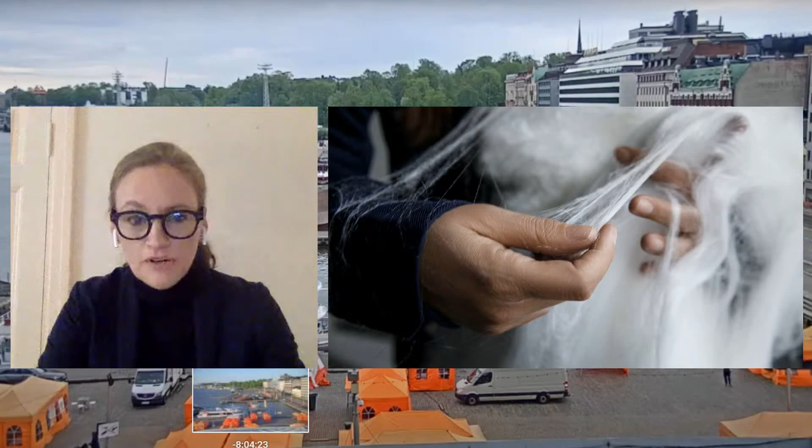Helsinki as a city and Finland as a country are known for design and architecture. Our legacy in functional modernism punches way above our weight. For example, the Finnish baby box, first introduced in the late 1930s, has been a design and service design concept for parents around the world. Today we are pioneering sustainable material innovations, like the cellulose-based fabric Spinnova shown in the image, along with well-being devices, education tools, and healthcare solutions that are embraced around the world.

When we talk about our city, we always talk about design and architecture. Yet our two national museums designated for design and the built environment, the Museum of Finnish Architecture and the Design Museum, are far from the institutions the professional communities and visitors, both locally and globally, expect and deserve. Both are operating in historic buildings that were never meant for museum purposes, limiting their ambitions in providing experiences and services for their users. This is now about to change.

In the past few years, a series of studies on the feasibility of founding a new museum for design and architecture in Helsinki have been conducted, looking at relations between the City of Helsinki, the State of Finland, and the two existing museums. A new project phase has been launched this spring with a clear objective: to produce a visionary concept, an operating and funding model, a design brief, and all the necessary data needed to make a final decision about building the new museum. The plan is to reach that decision by the end of 2023.

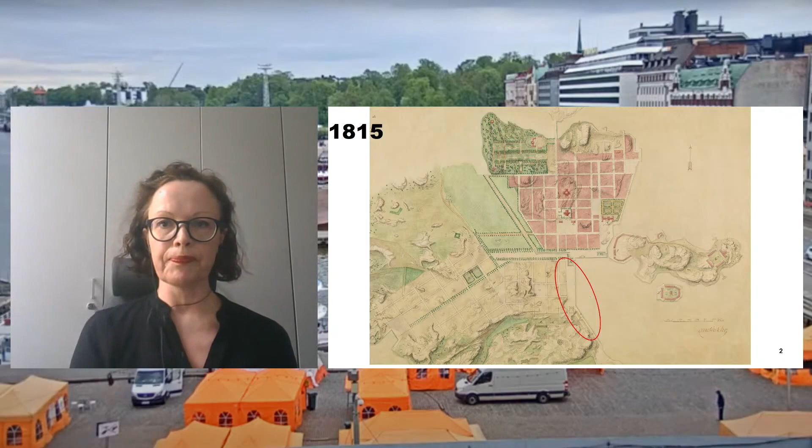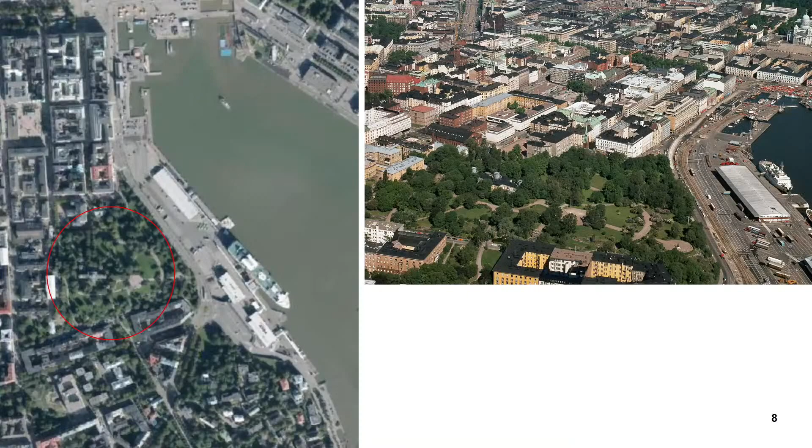Then I have some photos and I will tell you briefly about the existing buildings in the planning area. There's the old market hall, built in 1889, designed by architect Gustav Nyström. That market hall is the oldest of the 3 market halls in Helsinki, and the other 2 are situated in Hietalahti and Hakaniemi. The construction was advanced, as it has a steel skeleton inside, originally ordered from Germany, and the architect himself designed the facades and the wooden interiors. The building is still well preserved and still in its original use.

Then we also have 2 newer buildings at the South Harbour, also known as the Olympic Scenery from the Helsinki Olympics in 1952. Helsinki first got the Olympic Games in 1940, and the building was started in 1938, but it had to be delayed because of the war. The Olympic terminal here on the right side was built in the former area of a shipyard, which the city of Helsinki had purchased. This building was completed for passenger and freight traffic, designed by architects Arne Hytönen and Risto-Veikko Luukkonen, who won the architectural competition. The passenger travel from Helsinki to Stockholm started in the Olympic year of '52, first only in summer and autumn season.

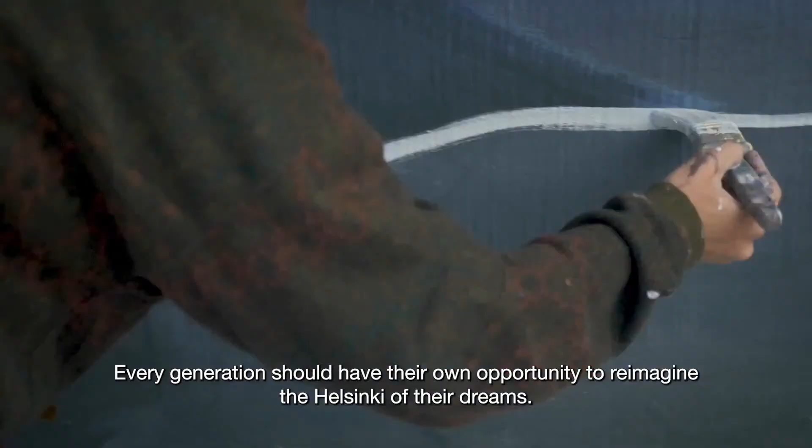As communities of people, cities are being built and molded throughout times in response to the great cultural, social, technological, and economic transformations people face. No one owns the way a city should look like. A city is never finished. Every generation should have their own opportunity to reimagine the Helsinki of their dreams.

The city of Helsinki is organising a competition to find a partner for the development and implementation of Makasiiniranta at South Harbour. The competition is a 2-phase quality and concept competition. Makasiiniranta at South Harbour is the last old harbour area to be developed in Helsinki, and at the same time, it is the most important and valuable one. The competition area is part of the Helsinki national landscape and largely a nationally significant valuable cultural environment. The place is central and symbolically very valuable and is part of the maritime facade of Helsinki's historic centre.

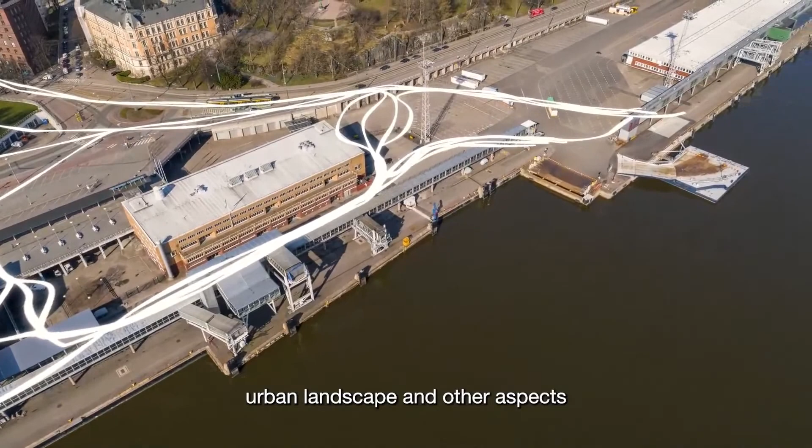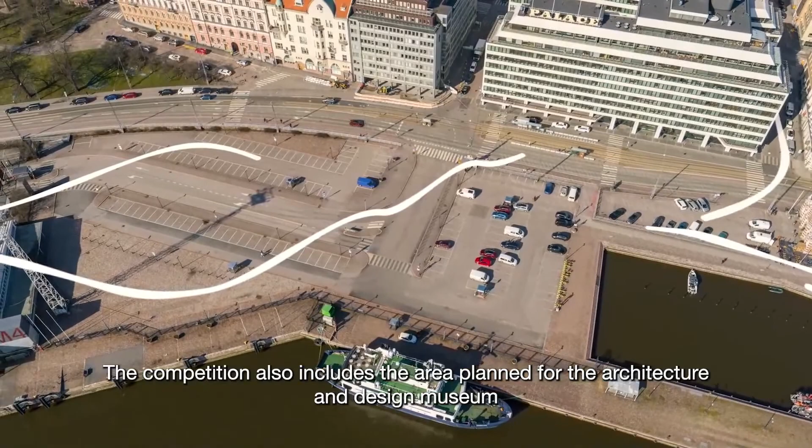A key goal of the competition is to produce an overall land use plan of exceptionally high quality and functionality that implements the city's objectives in terms of land use, urban landscape, and other aspects, and serves as a basis for the future development, detailed planning and implementation of the area. The competition also includes the area planned for the Architecture and Design Museum, the aim of which is to ensure that the museum becomes a natural part of the high-quality area.

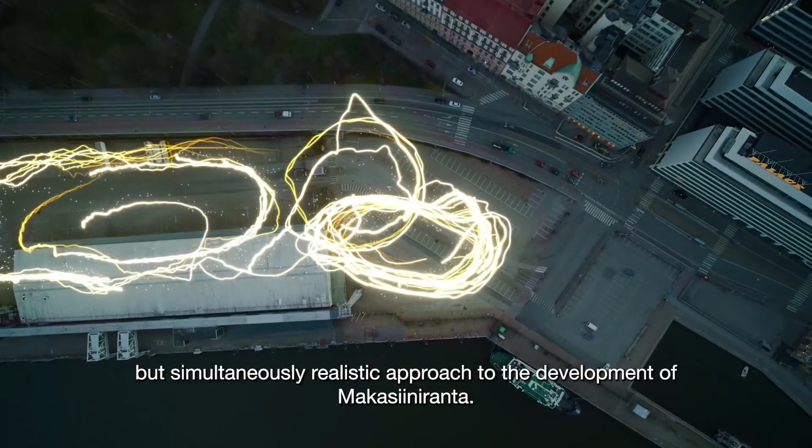We are committed to creating an extremely ambitious but simultaneously realistic approach to the development of Makasiiniranta. The whole Helsinki city organization supports the best possible realization of the area. The highest possible level of ambition must be visible from the planning to the building phase.

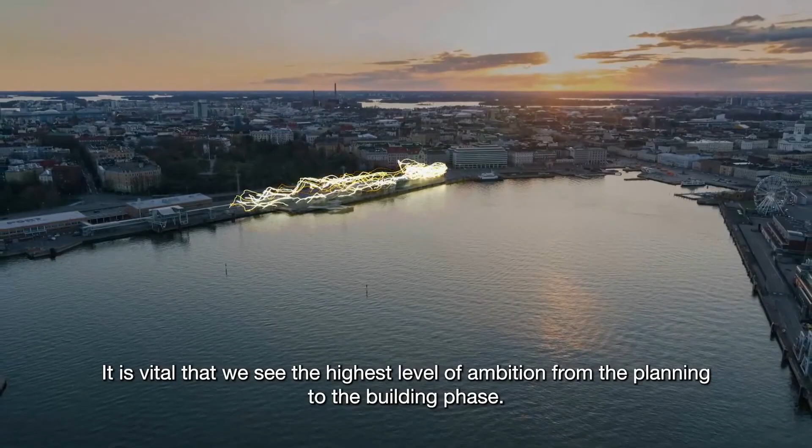There you go. A little ambition there, ambition level there. I do recognize my own hometown from those pictures.

And so now we dive into different angles of the area and of the competition. And first we take a look at the cultural environment and landscape.

Anu Lamminpää is a landscape architect of urban space and landscape planning at the Urban Environment Division at the City of Helsinki. Welcome. Good afternoon, my name is Anu Lamminpää. I am a landscape architect working for the City of Helsinki. I am going to talk about the Makasiiniranta area in the South Harbour Bay from the landscape point of view.

However, when we talk about this area, we do not only talk about the landscape, but also about the very unique cultural environment, as we heard in the previous presentations as well.

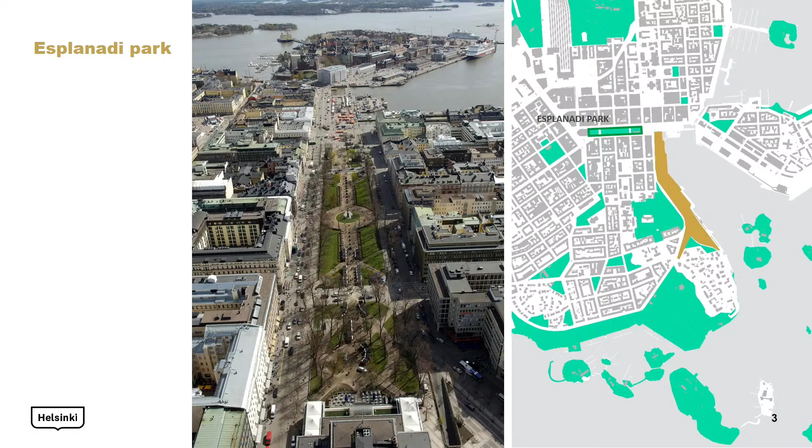At first, it was a popular walking place for the upper class. Now it is a very popular place to be for all, especially in the summer. And as said, an important pedestrian link between the South Harbour and other parts of the city center.

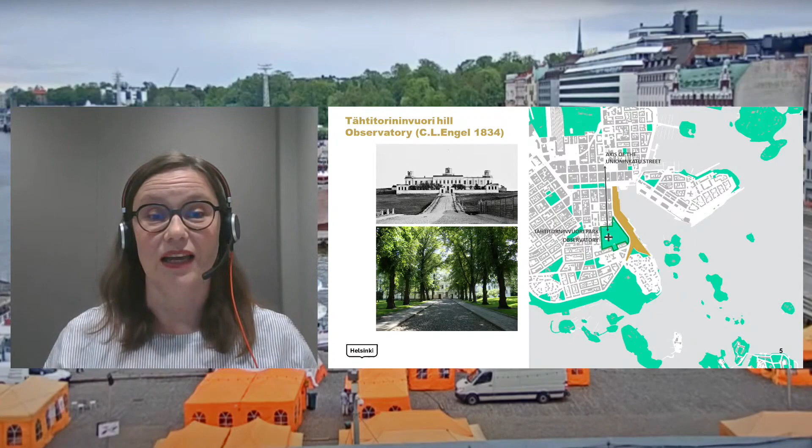Other historical park connected to Makasiiniranta area is the Tähtitorninvuori Park. It is located on the highest point of the Helsinki Peninsula, 32 meters above sea level. All its known historic purposes have been connected to the dominating position in the landscape structure, and also to the views to the sea and its surroundings.

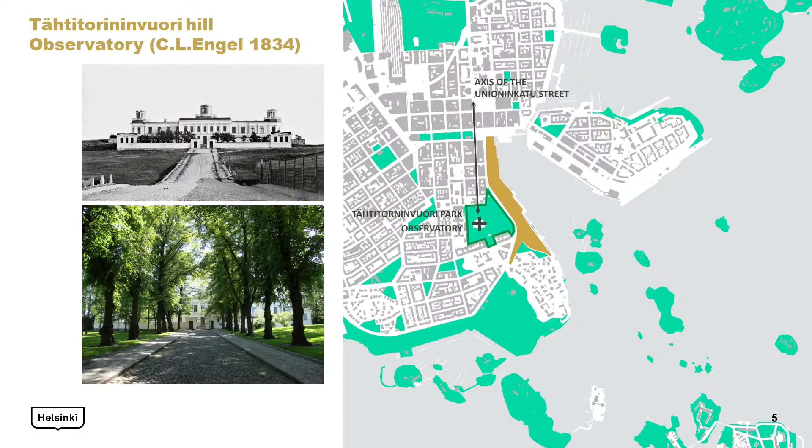The name of the hill comes from the observatory. It was very modern in its time. It has an important position in the cityscape as an end of the axis of Unioninkatu Street. Till the end of the 19th century, it was also a visible landmark. Now it is surrounded by trees and it is not so visible in the cityscape anymore.

Tähtitorninvuori Park is Helsinki's first municipal public park that was designed and constructed by the city to the Tähtitorninvuori Hill in the beginning of the 20th century.

Sceneries and visibility were an important design idea of the park's plan. It soon became an official viewpoint to the market square, Makasiiniranta and Katajanokka. One of the park's greatest values is the view opening to the sea.

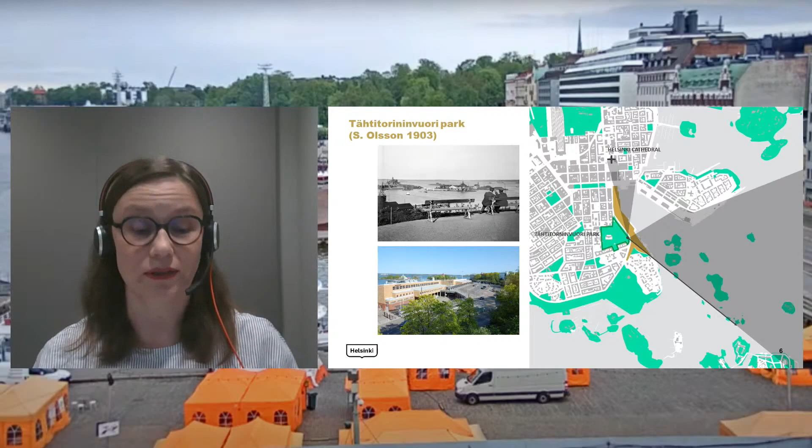There are several viewpoints in the park, for example different viewpoints to the nearest churches that are marked with the cross in the map. The views have been designed so that you can see, for example, Helsinki Cathedral, so that the vegetation of the park forms a frame to the view, and there is a classic Helsinki silhouette in the background.

Postcards sent all over the world with these views were used earlier as an advertisement of the city as well. The park has never been in direct connection to the level of the seashore, so its position in the landscape structure and in the cityscape has its historical value.

Kaivopuisto Park is located south from the Tähtitorninvuori hill. In the beginning, it was private and for the higher society. At the end of the 19th century, it was transformed into a public city park. Tähtitorninvuori Park was constructed at the same time. Together, it influenced Ullanlinna and Kaivopuisto developed into an exclusive city district.

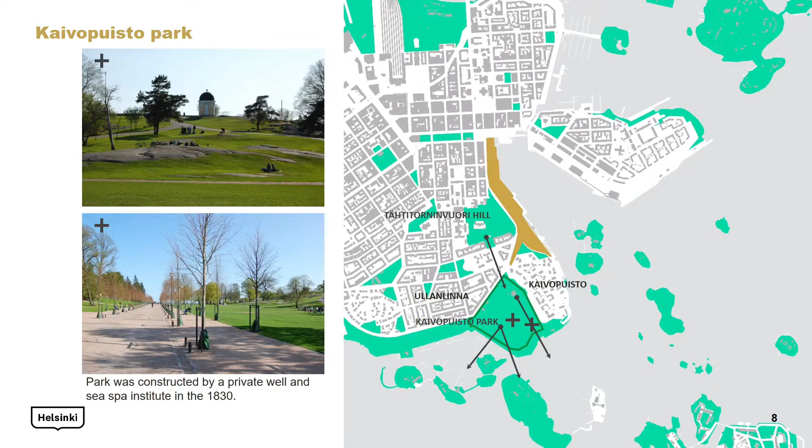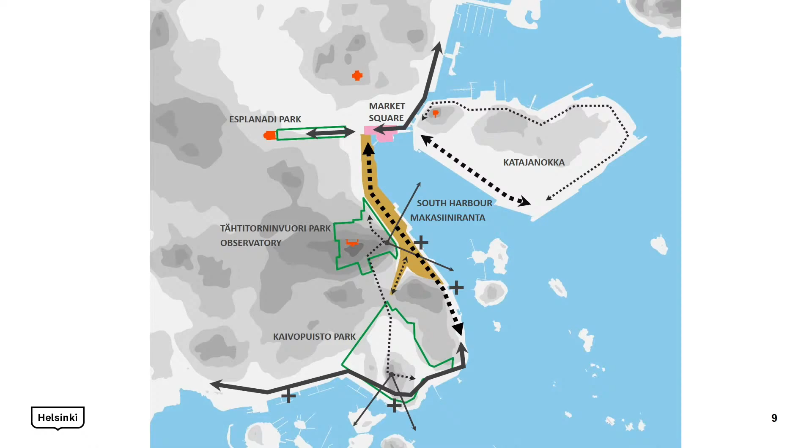Here is the map of the topography again, and you can see how the main routes for the pedestrians are located. As you can see, we have two parallel routes here. The coastline promenade is important and very much used, but in Makasiiniranta it still has a lot of potential to be developed.

One very popular option is also, at some point, to climb up to the Kaivopuisto Park hill and see the view to the Southern Sea. Then continue to the Tähtitorninvuori hill and see Makasiiniranta and the whole South Harbour Bay. And then go down and continue to Market Square and from there through Esplanadi Park to the city center, or vice versa. These old parks and the coastline promenade are linked together in the Southern Helsinki public space network.

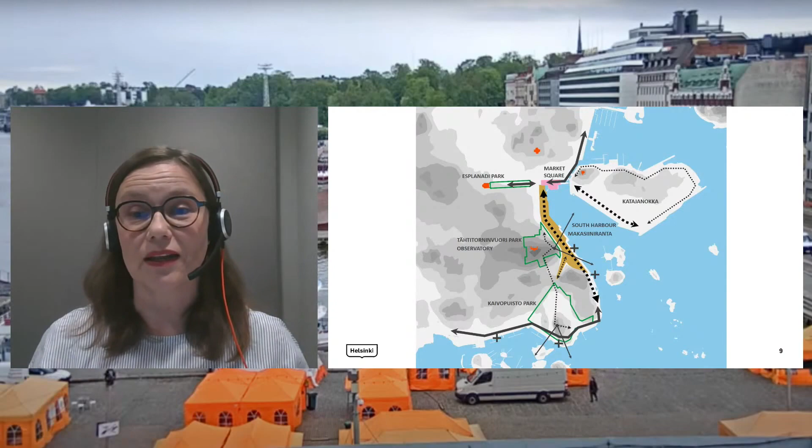I will show you four pictures along the way, two first from the Makasiiniranta and then two from the southern shore. It is not a very pleasant environment at the moment, and it is very narrow and has its distance from the sea. South from Olympia Terminal, it doesn't look like the beautiful promenade would continue.

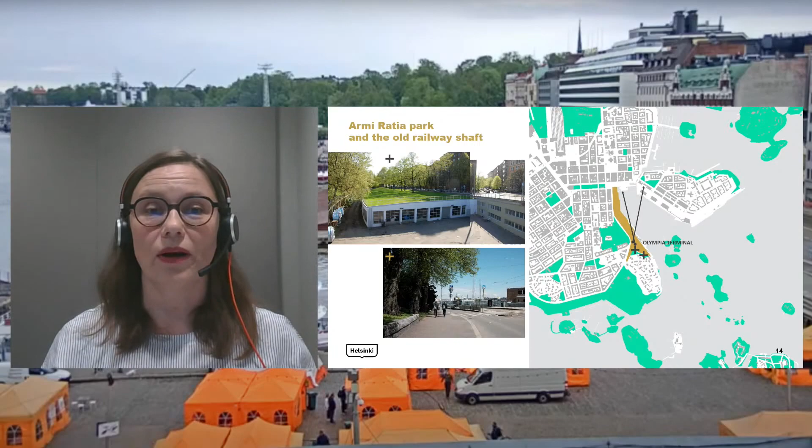The historical parks are not in the competition area, even if they are tightly connected to it. Inside the competition area, we have Armi Ratia Park, western side of the Olympia Terminal, marked as a cross in the map. There is a port railway shaft that is no longer in use. Now it is an important part of the green structure connecting visually Kaivopuisto Park to Makasiiniranta.

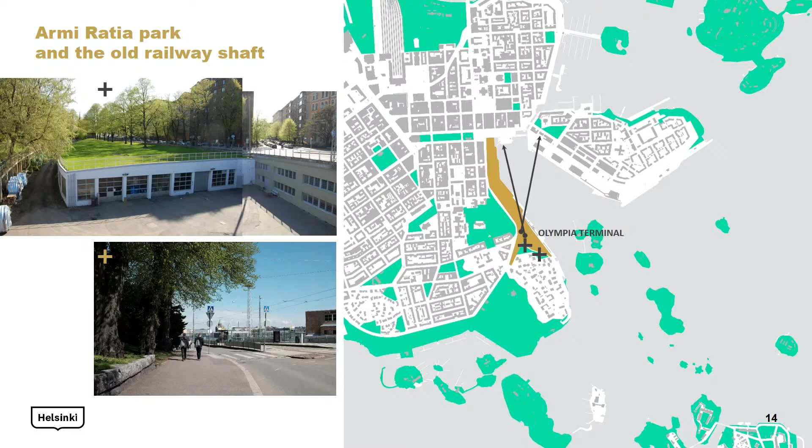It is typical for the old Helsinki city structure that at the end of the street view is the sea. This is also the case in the districts surrounding Makasiiniranta. In Makasiiniranta, we want to create the missing part of the seaside route around the shores of Helsinki. There is no need to make significant changes to the shoreline, but the seashore shall be in public use except in the port area. The new public outdoor space should be high quality with its own identity, but in such a way that it is a natural part of the surrounding city.

Then we still have the aspect of the sea. The islands in front of the coast of Helsinki are a very important part of the green structure for recreational use. There are many ferry boats from the Market Square, like to Korkeasaari Zoo and Suomenlinna Islands, and in the future there will be even better connections to the near islands and to the coastline in general.

So first, to show you the location of this competition area in Helsinki, it's very central. The South Harbour is the maritime heart of Helsinki, and its connection to the city centre is one of the key elements in Helsinki's city strategy.

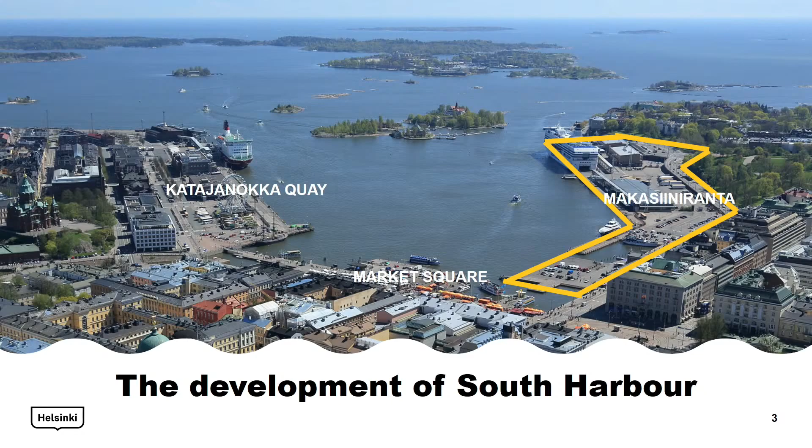The goal of the competition is to extend the downtown area to Makasiiniranta and have access to the sea. The South Harbour area is one of the city's most important development projects, and Makasiiniranta is being developed as part of the entity. The area, which is now currently mainly used for port operations and parking, will be transformed into a comfortable public urban space and a more human-centric environment.

The importance of this area is enormous to the residents of Helsinki. Market Square is, of course, a place for trade, but it's also a place for big celebrations, like the 1st of May festivities, New Year's Eve, or when Finland wins the World Championship in ice hockey or Eurovision Song Contest.

Next, I will speak about the objectives we have for the competition area. The pedestrian-friendly center will expand to the Makasiiniranta area. We are expecting to have attractive, high-quality outdoor spaces. The seaside promenade and new outdoor spaces are desired to be spatially diverse and attractive.

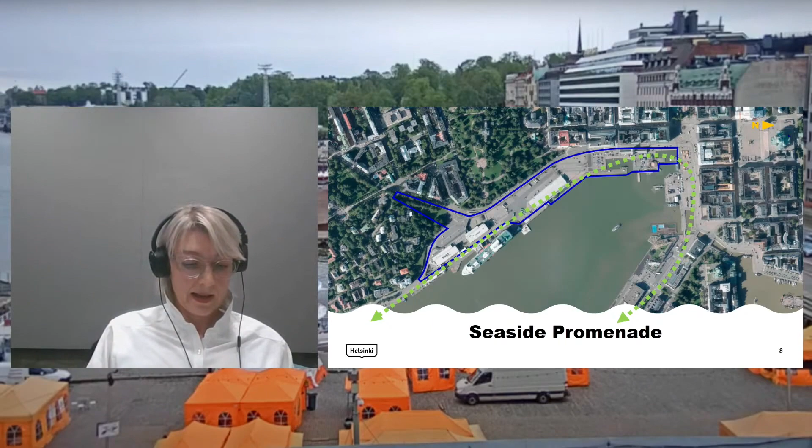Sorry, I have some problems with the clicker, but now it seems to be working fine.

The new architecture for Makasiiniranta will build a new layer to the marine facade of the South Harbour. We are looking for ambitious and extremely high-quality architecture in this valuable location. Architecture must be contemporary, but respect the history and have a deep understanding of the requirements of this unique location. The new urban plan and structure should be characterful, interesting, and a strong entity that strengthens the identity of the area.

And next, I will zoom in to the different surroundings of the competition area. The seaside promenade runs through the competition area and connects to the extensive public seaside promenade around the Helsinki Peninsula.

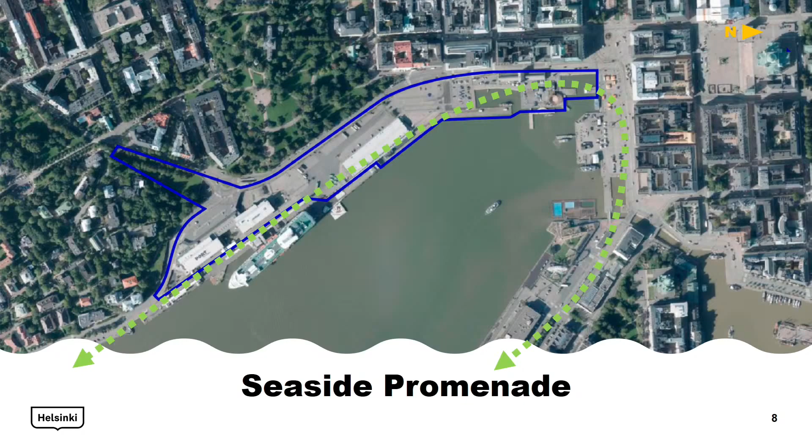Lübeckin Laituri Pier is spatially and functionally an extension to the market square. The old market hall is a valuable building and will be dominant on the pier. It is possible to think of new suitable functions for the old market hall, and at best, the long food history will be seen in its future use.

Small additional constructions, pavilion-like buildings to the old market hall, would enable technical modernization of the building and improve its functionality. There is also a need for a waterway transport terminal that can be solved by building a small pavilion or as part of the old market hall's operational concept. And pedestrian access towards the market square and esplanades should be improved.

The museum will be located in Makasiiniranta as the northernmost new building in the area. The location is south of the Eteläinen Makasiinikatu street line, leaving the view towards the sea open. North of the museum will be a big public plaza by the sea, providing access to the sea waterfront. The new facade of the museum is at the end of the view from the market square, and that will be very dominant in the cityscape.

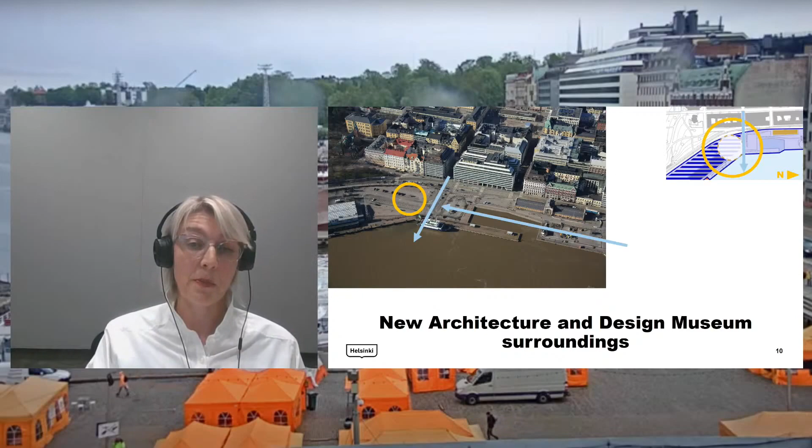The focus area for new construction is in Makasiiniranta. That location is highly visible in the heart of the city, and the new area can be seen from the shores of the southern harbour area and from the sea. This prime location offers opportunities to build a new part of maritime Helsinki. Makasiiniranta offers opportunities to develop the area for different functions and activities on the waterfront. The facilities on pedestrian level along the seaside promenade, streets and squares should feature functions that are open to the public and make the public space livable and lovable.

The planning principles for new construction protect the values and special features of the site. The silhouette of the green Tähtitorninvuori hill will rise above the roofs. The maximum elevation for new construction is plus 20 meters above sea level for the entire length of the planning area, and the maximum elevation for construction closest to the shore is plus 18. These can be exceeded only for very, very good reasons.

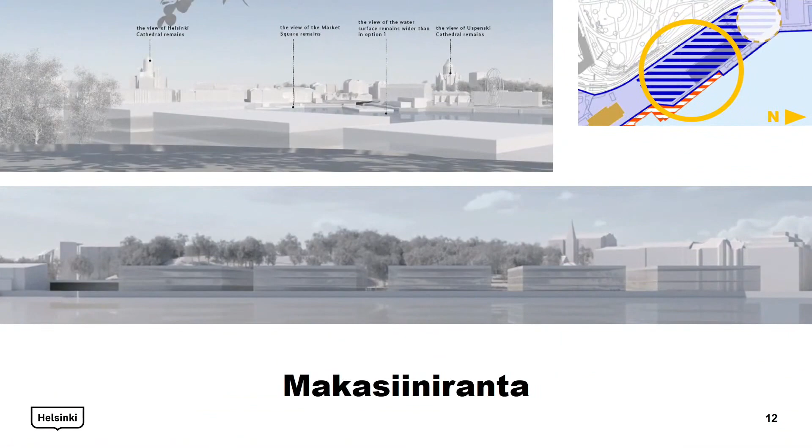These buildings are visible from every side and they have no rear facades. Also, the roof surface is very visible as seen from Tähtitorninvuori hill, and that must be designed as the fifth facade of the buildings.

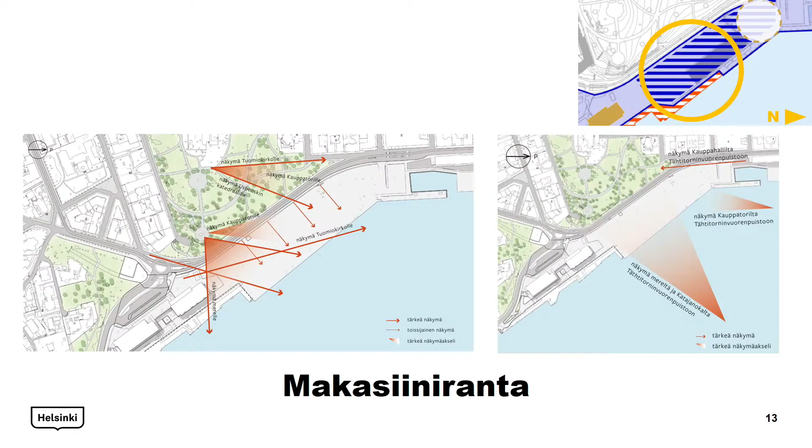New construction takes into account the various and valuable views of Laivasillankatu street towards the sea and the cathedrals. New construction also allows a variety of pedestrian routes from the street to the seaside; connections that are sufficiently loose in terms of cityscape and functionality will be indicated between Laivasillankatu street and the seaside. Connections through the blocks will complement the connections formed by public outdoor spaces.

Port House and Olympia Terminal have significant conservation values, and we are looking for new suitable functions for these buildings. There is a need for a smooth pedestrian connection from in front of Port House to the seaside trail. The elevation of any extension of the deck in front of Port House must be integrated or landscaped into the surrounding elevations. And in this area, there is a need for a high-speed vessel terminal in the vicinity of Makasiini Quay.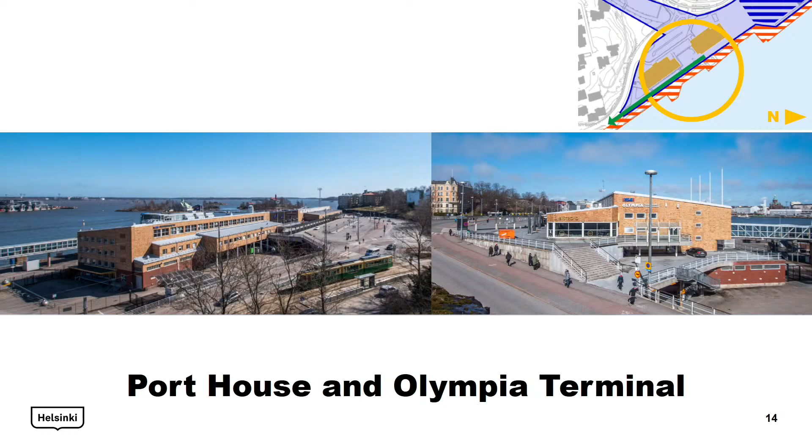The connection from the seaside area to Armi Ratia Park provided by the old railway shaft will be investigated as part of the overall plan. The connection between the park and the deck in front of Olympia Terminal also needs improvement. This area will be developed as a park area that functionally and scenically connects the seaside with public outdoor spaces. New functions can be developed below the park.

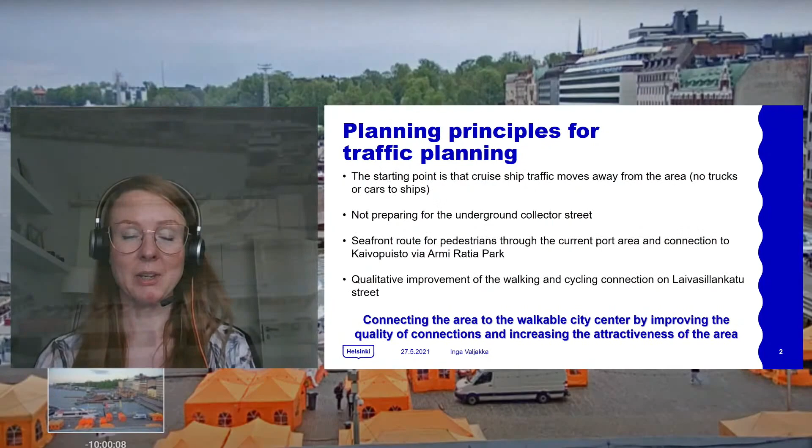Here you can see planning principles for traffic planning. The starting point, which is a really big thing, is that cruise ship traffic moves away from the area, meaning there will be no trucks or cars to the ships. This is why different traffic modes will change, and this will be the big change in the area.

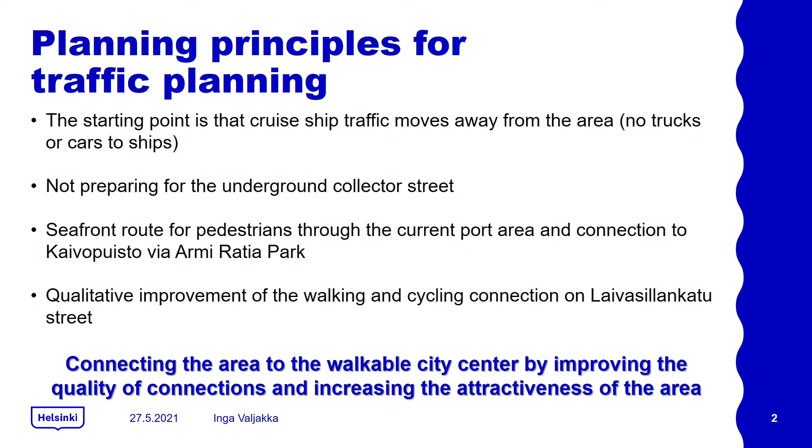Also, you have heard about this underground collector street, and you don't have to take it into account or prepare for that in these plans. And there is this seafront route, talked about a lot before this presentation, which should be for pedestrians through the current port area, with connection to Kaivopuisto via Armi Ratia Park. This qualitative improvement is also important.

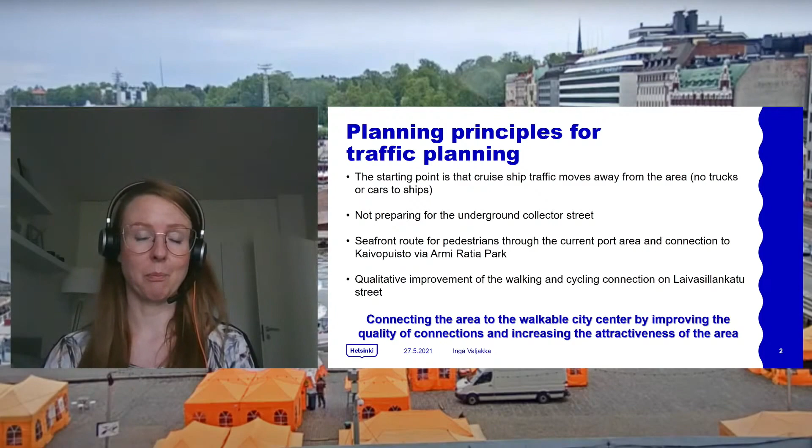The most important thing is that walkable city is the main thing in this area. So you have to take it into account, improving the quality of connections and increasing the attractiveness of the area so that pedestrians could have more qualitative connections there.

Also these planning principles for service traffic, when all goods are moving. There's two options to plan that: this service connection and service yard at basement level will release additional floor space on the ground level, giving more opportunities to develop that ground level, and this is also a significant cost factor at the same time.

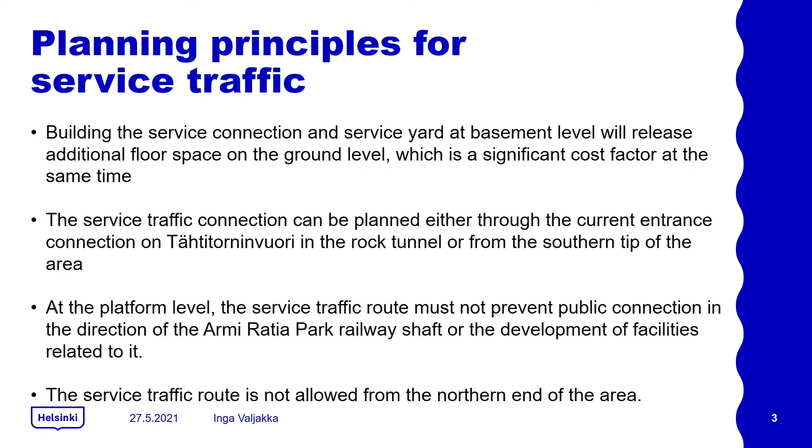Service traffic connection can be planned either through the current entrance connection on Tähtitorninvuori in the rock tunnel, or from the southern tip of the area - there will be soon a map about that. Also, service traffic route must not prevent public connection in the direction of the Armi Ratia Park railway shaft or the development of facilities related to it.

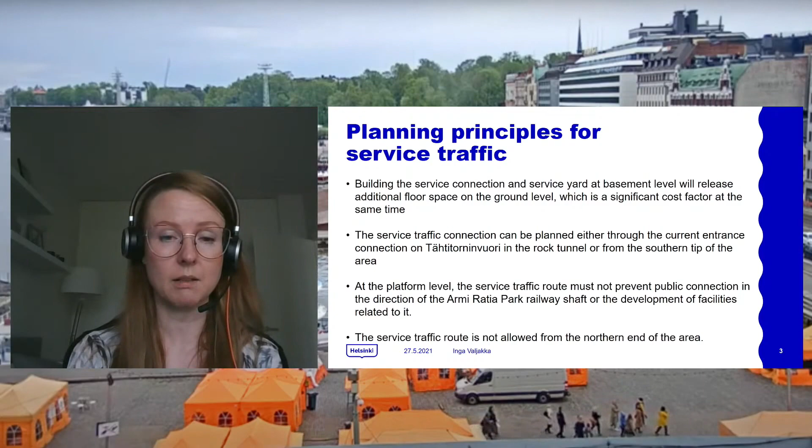Here are also planning principles for public connections. I know there is a lot of text, and all these things have come up here once already, as we have seen how other presentations have shown.

Maybe the most important thing is that this development takes into account the cruise ship traffic that will remain at the Olympic Pier, and this is how it's going to change. This is a thing you have to think about when you plan this seafront route that follows the seafront.

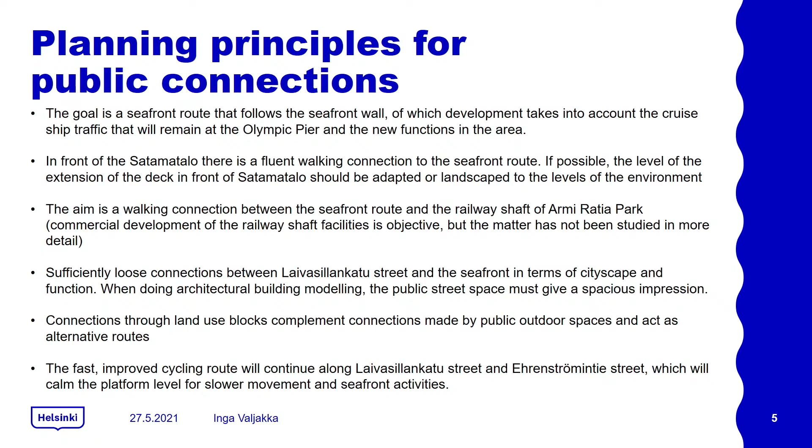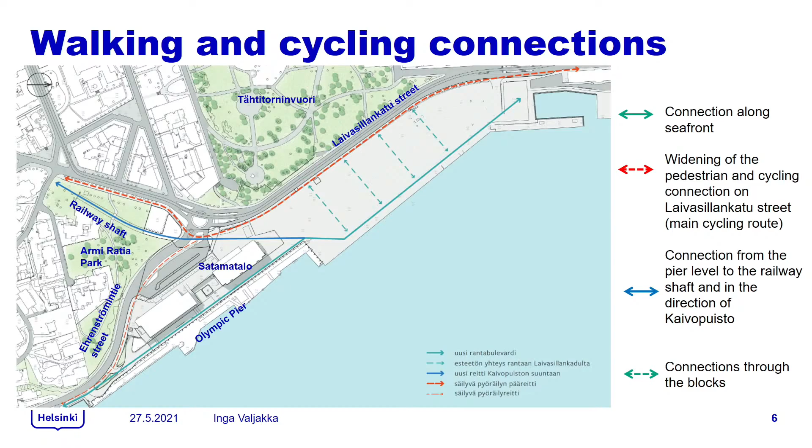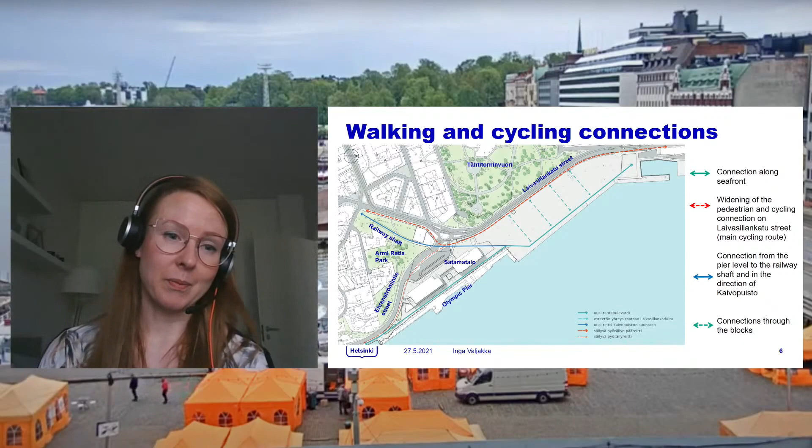Also this blue one, you can see a connection to the rail shaft to Kaivopuisto - Salla already told about this connection and why it should be planned. And there is also this fourth connection between Laivasillankatu Street and this harbor seafront area between blocks.

Okay, here is almost the last slide, and here is actually a summary of all these things I have told here. So the seafront route has come up many times in these discussions, and how it should be taken into account. You cannot plan traffic or public spaces if you don't take into account every surrounding area.

You have to take these cityscape things into account also, and city structure, and this walkable city center and developing it, and how you connect this area to the city center, it's really important. Also Kasarmitori, Esplanadi Park, and Market Square must be taken into account. And Eteläranta is really important as its position. And Unioninkatu Street is also working as a collector street, which means that they collect cars and other traffic from smaller streets.

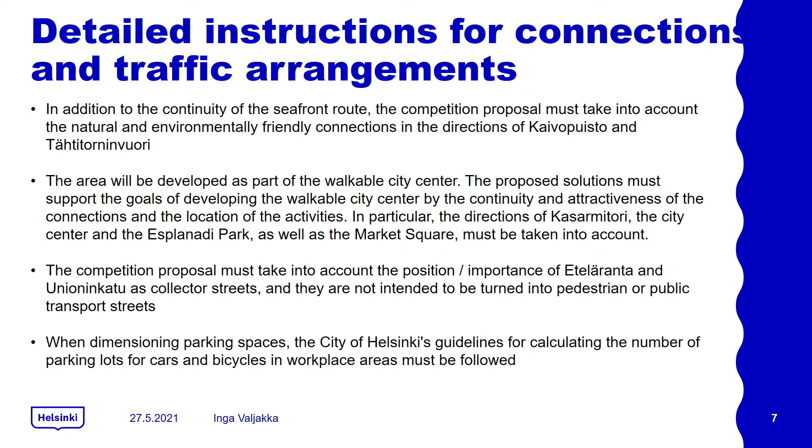And here comes the last slide, and as you can see, I'm only presenting this. If you have any further questions, please contact Pekka Nikulainen. Thank you very much.

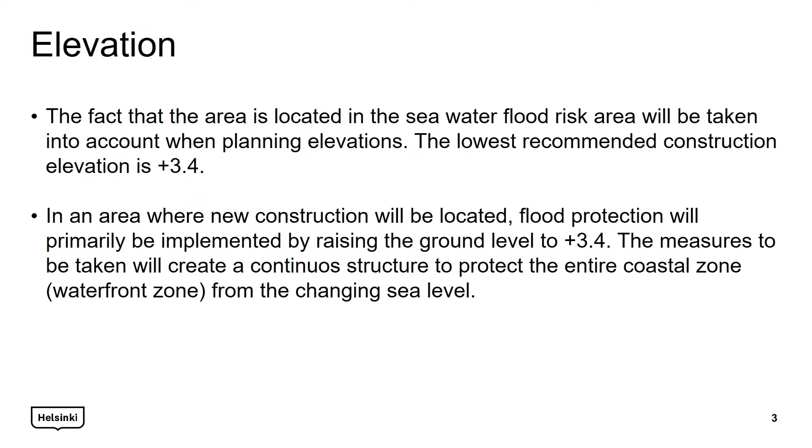Current elevation in the area is from +1 to +2, around that, and the ground level will be raised to +3.4, and that measure will create a continuous structure to protect the entire coastal zone from changes in sea level. Here is a picture of the new construction area, so in that area the ground level will be raised, but the seashore connections, existing and new, can be below that number.

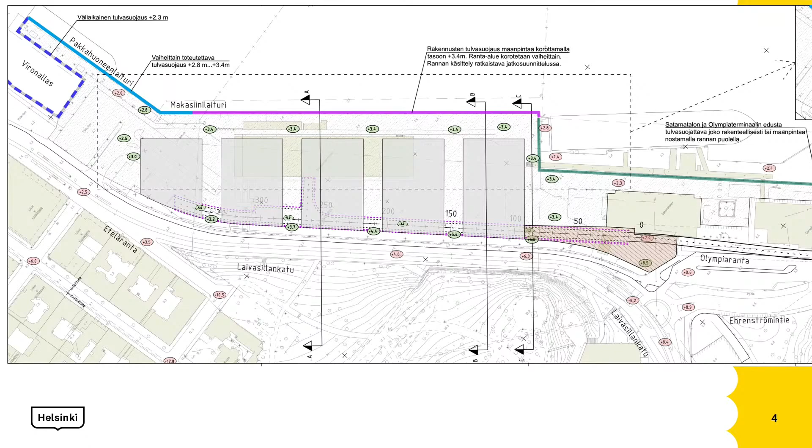They are there at +1 to +2. They can be lower than +3.4. Also existing connections in Vironallas and Olympiaranta area can be below that 3.4. And there is also a great need for restoration and rebuilding of the waterfront and base structures in order to ensure the geotechnical stability of the area.

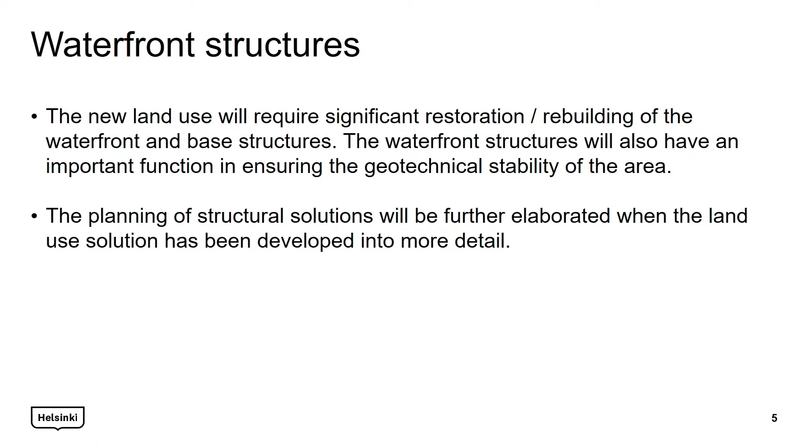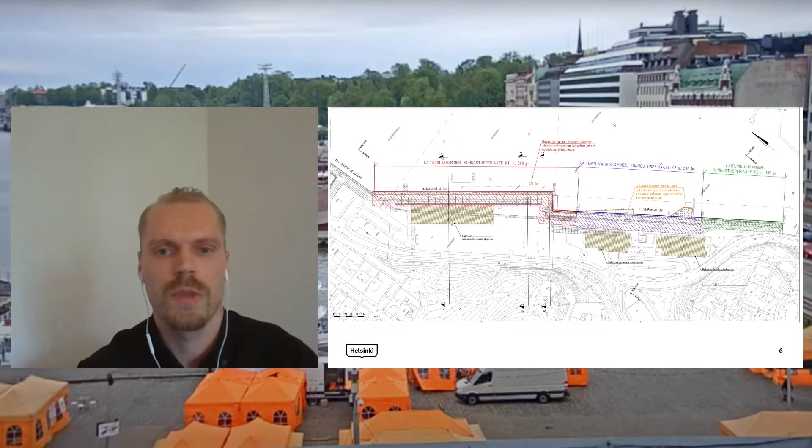These structural solutions will be elaborated more when we have a clear vision of what the building is going to be and how the area is going to be. Here is also a picture of them, so we have different colored areas - red, blue, green - and there is going to be a different kind of repair method for the restoration and rebuilding of these structures.

Geotechnology: most of the land area consists of mixed fill, which has been made for the use of the harbor during a long period of time. And the rock surface in this area is around -10 to -25. So that means new buildings will be built on pile foundations.

There are also some old structures in the ground that are either foundations of former buildings or foundations of quay lines. The city is carrying out some geological tests in the area to have better knowledge and to refine the soil quality and contamination data, to have better knowledge about the soil in the area. These topics that I discussed, the city will design and construct.

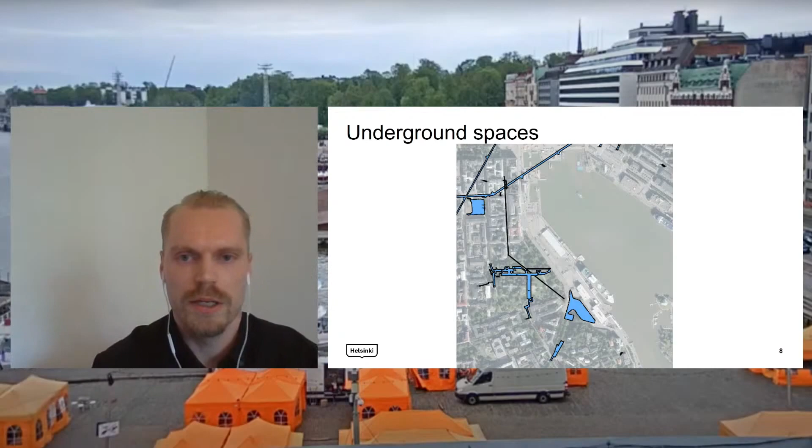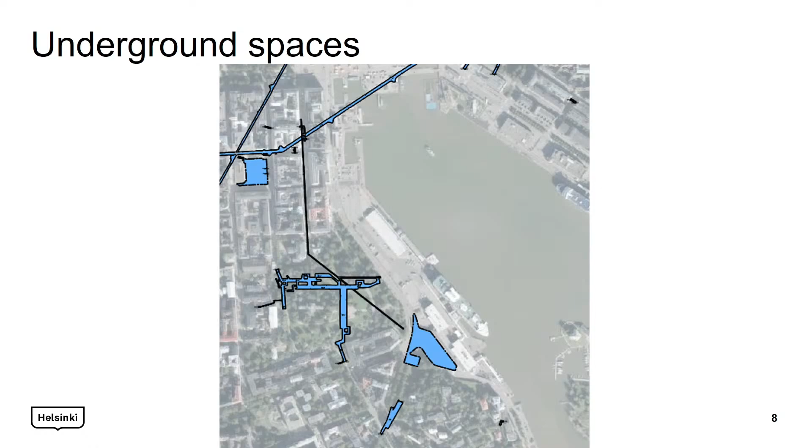Here is a picture of existing underground spaces. Under Tähtitornin Park, there is a parking hall, and through Tähtitorninmäki also goes a sewer tunnel. Their elevation is around 0 to +5, not including driveways and shafts from the parking hall. In the northern parts of the area, there is an infrastructure tunnel located deep in the bedrock, around -40 to -50, and in front of the Olympic terminal and port house, there are existing deck structures.

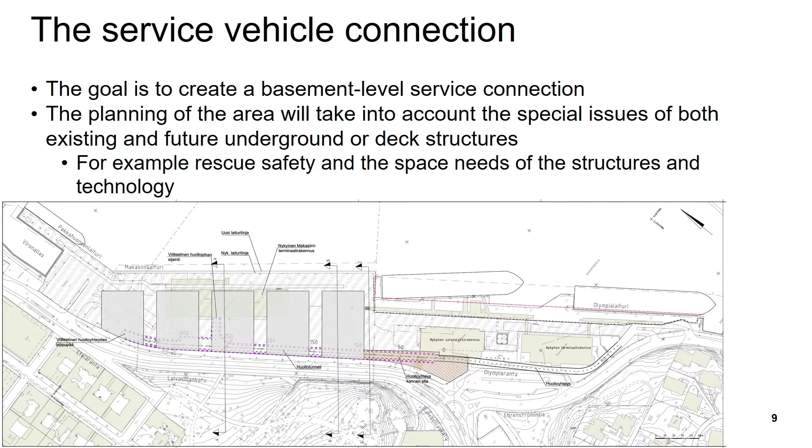Then we have this service vehicle connection that was also talked about in the traffic part, and the objective is to create a basement level service connection. In the planning, we will take into account the special issues of both existing and new underground spaces and deck structures, for example rescue safety and all the needs of the structures and technology those places require.

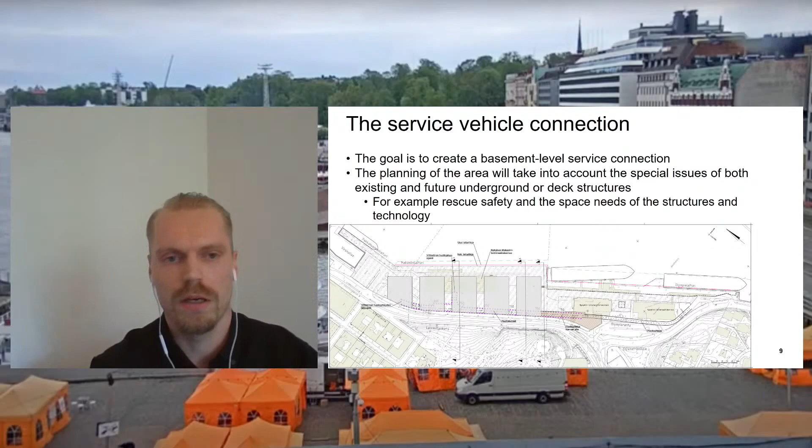In this picture, you can see the first option: driving to that connection from the south. Here is another option, to the Tähtitorninmäki parking hall. This connection, the new construction area in this competition, will serve that area but also the new museum area, so space needs to be reserved for the new museum so the service can work through this connection.

Here is also a drawing of this connection. On the right-hand side is the sea, and on the left-hand side is the street. On the left-hand side, that foundation line can also be used for the forces and foundations of new buildings. There are some elevations depending on where this drawing is. The floor level of this connection could be around -5 to -1, and groundwater around 0.2. Current ground level is about +1.9, and the new ground level is 3.4 in this area.

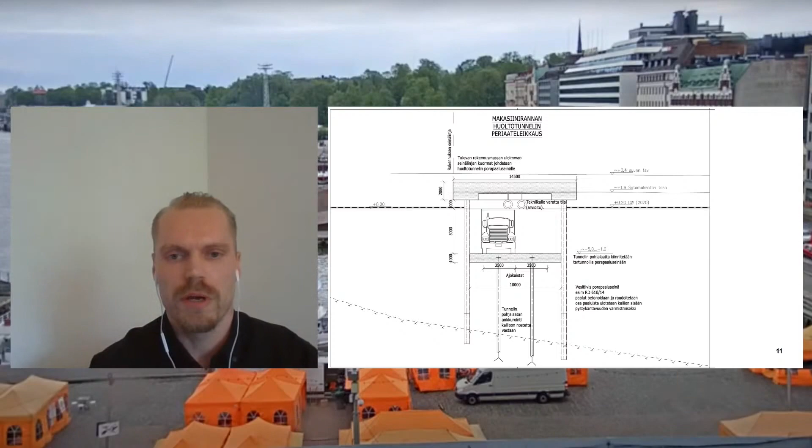Also other technical issues you can see from this picture. In the appendix, in the technical report, which is an appendix in this competition, there is more information about these topics.

Then we have infrastructure maintenance networks. In the planning, we will take into account the existing infrastructure and also the maintenance projects which are planned for the area, the new projects.

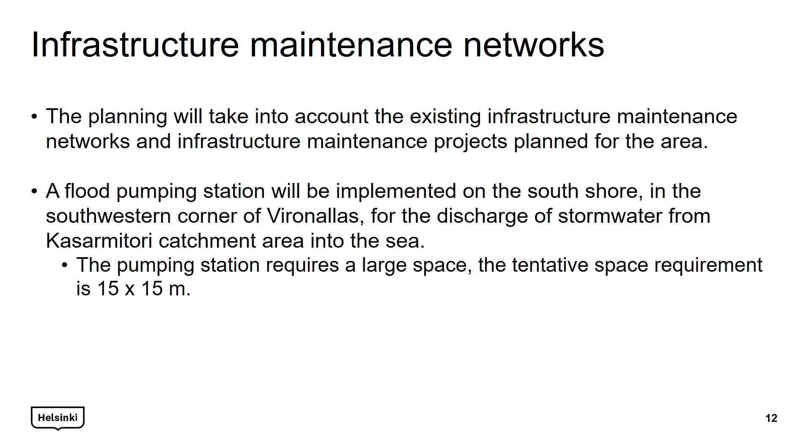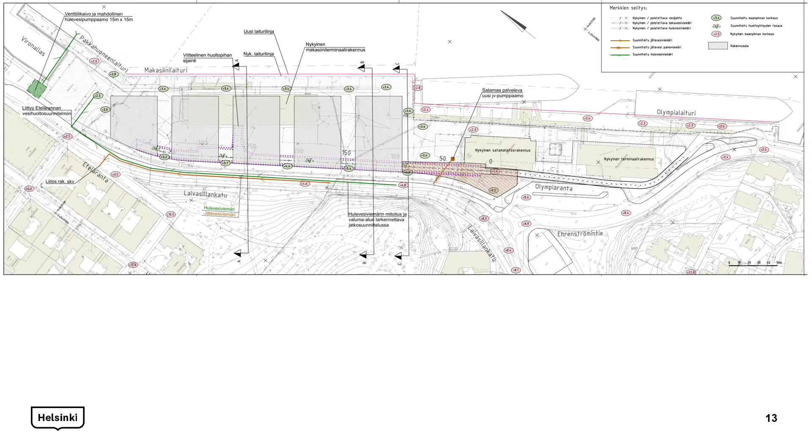In this competition, there's a flood pumping station which will be implemented in the southwest corner of Vironallas, in order to discharge stormwater from the Kasarmitori catchment area into the sea. Here is a picture of it, that green area there across Vironallas, and this is also in the technical report. The space needed is 15 by 15 meters, and that exact space is shown in the drawing. It doesn't need to be exactly there, but it's around that place, and the important thing is to reserve that space. All the new infrastructure needed for this area will be under Laivasillankatu.

Then we have environmental disturbances. In the planning, we will take care of noise, air quality, and other environmental impacts from land and waterway transport. One characteristic of this area regarding environmental disturbances is low frequency noise from ships, which will require special structural solutions to prevent it from affecting buildings, and it also limits the functions that can be located in the area. So it is recommended to use acoustic knowledge in the competition, but those structural solutions can be created in the more detailed planning.

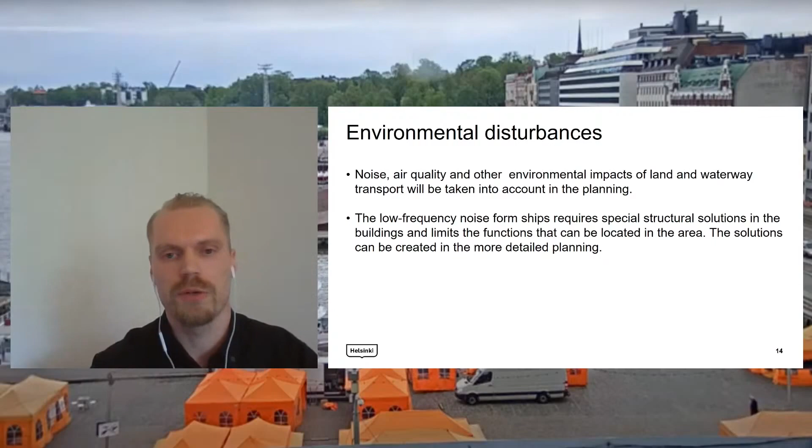So that was my presentation. Thank you for listening, and I want to wish all the best for the competitors, and thank you.

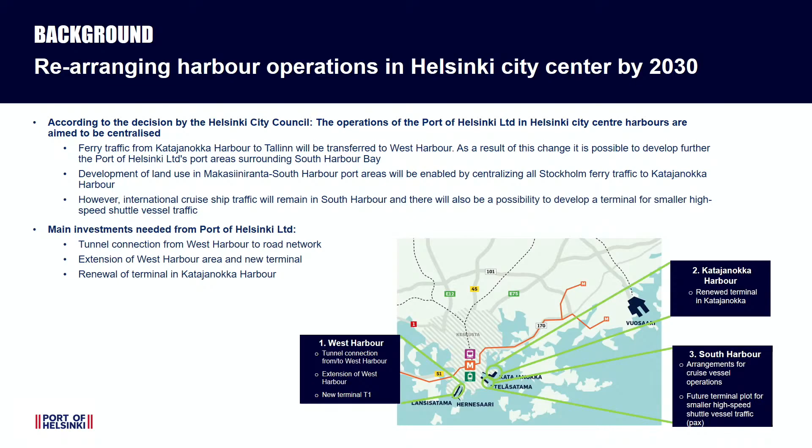There are several investments needed from Port of Helsinki to enable all this development. One big thing is the tunnel connection from West Harbor to the road network, also the West Harbor area extensions, and building a new terminal, as well as a renewal of the terminal in Katajanokka Harbor. So we are at the starting point of a great big development project for Port of Helsinki also.

And finally, in 2030, the South Harbour will be released, most part of it, from the harbour operation.

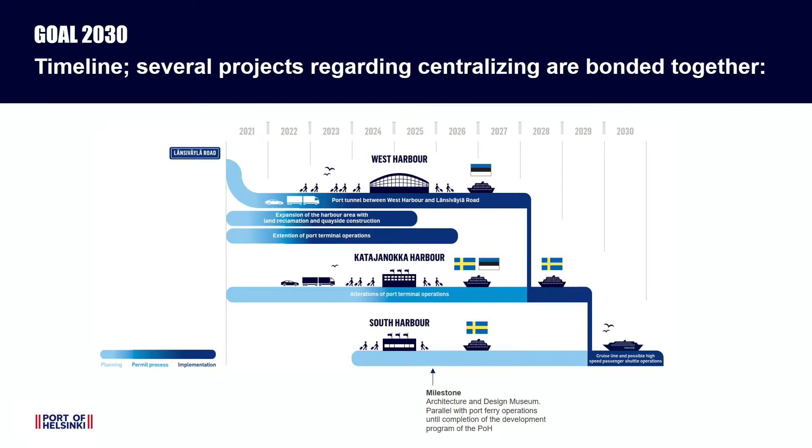But with this quality and concept competition, Makasiiniranta, we see the South Harbour, Port of Helsinki's South Harbour, will change as a result of this development. The port will not be present in the area as extensively as we are now, that's for sure. But we at Port of Helsinki believe that the port operation and the area's new use will coexist in an excellent way for the next hundreds of years here. One interesting and big thing is that the South Harbour will keep its original name and function, holding its original use as a harbour. But as you can see from the map, the areas reserved for harbour operations will reduce hugely.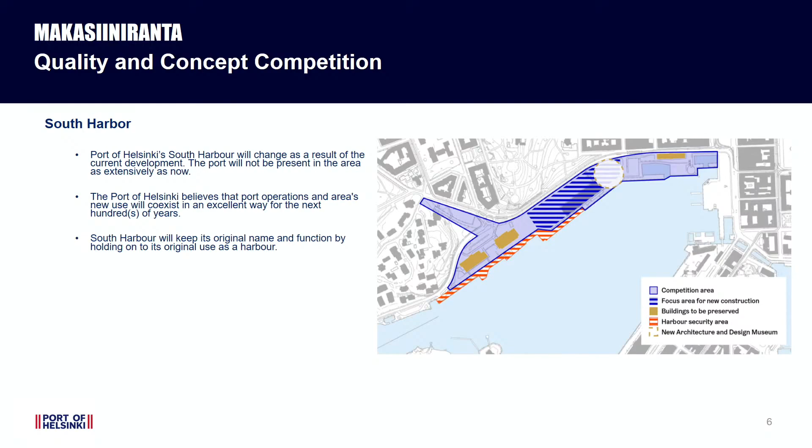Here is a quick slide which we are very proud of, having the harbours inside and right in the city center, Katajanokka and South Harbour, also in West Harbour, and that all enables us to be Europe's busiest passenger port, and of course the main port for Finnish foreign trade. But I wish all competitors best luck with your planning studies, and we will cooperate in the future. Thank you very much.

Thank you very much. And then an important viewpoint to urban development in Helsinki in general is the Carbon Neutral Helsinki 2035 Action Plan. And now we hear from Kaisa-Reetta Koskinen, who is the project director at Carbon Neutral. Welcome. Thank you. Thanks for having me.

Every time when you are speaking about the climate, I think that you have to start by giving reasons why we are doing this. Okay, next slide please. This time I'm not going to show you pictures about climate change and the curves about how carbon dioxide is increasing in the atmosphere, but I'm going to start with this picture, and this is a very good motivation and a very good question on why we are doing this, why we are fighting climate change.

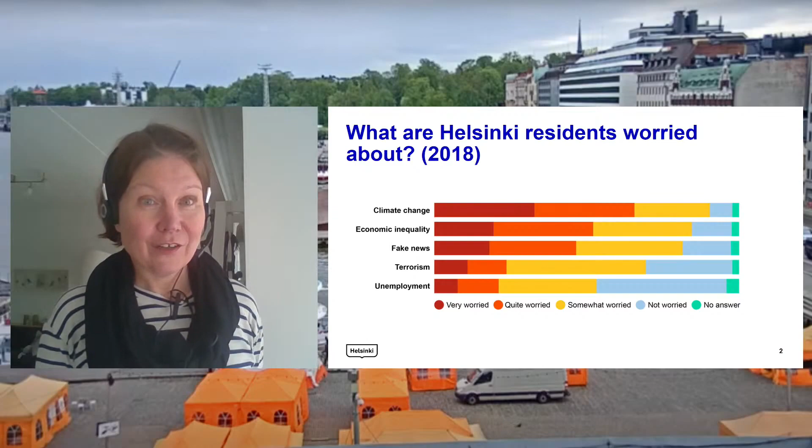This is a study made a couple of years ago, and it shows very clearly that the residents of Helsinki are very worried about climate change. Almost 90%, or a little bit more than 90% of the people, are at least somewhat worried about climate change. And it's remarkable to notice that actually it's much more, about double, than the people who are worried about unemployment, for example. So as a city representative, I think that this gives us a very strong mandate, and not only a mandate, but this is a very strong urge for us to do everything we can to stop the climate change. Next one please.

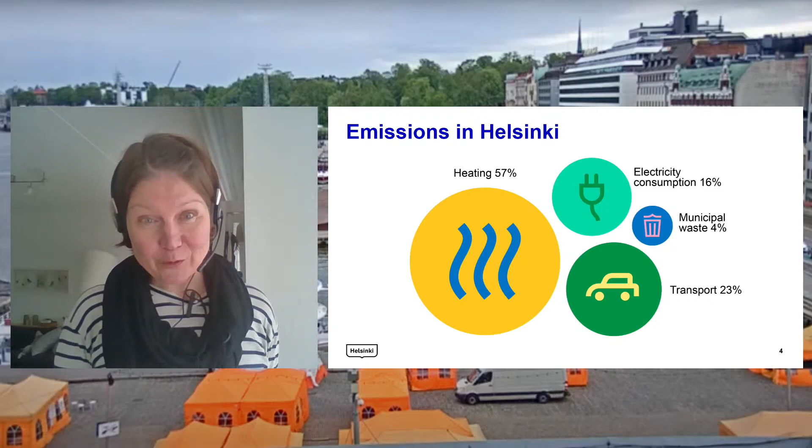Next one, please. In this picture, you can very clearly see where the emissions of Helsinki are coming from. More than half, almost 60% of the emissions, are coming from heating. The second emission source is transport, about roughly a quarter of the emissions. Then electricity consumption and waste together are around 20%. So these are basically the big things we have to focus on. We have to make big emission reductions, and that's why we have to focus on the big emission sources. Next one please.

We are doing many things around these emissions, and as I only have 10 minutes, and we are focusing in this meeting on designing and building and that kind of city planning, I'm also going to focus a little bit more on those things. So if you are interested in what we are doing in general, you are able to find our action plan on the internet, and there are more than 100 different actions we are doing. But a couple of years ago, we calculated and evaluated emission reduction potential, to see where we are able to get the emission reductions. Around 45% of the potential for emission reduction is somehow related to buildings and construction. So actually buildings and construction are actually at the very core of this climate fight. Next one please.

Energy efficiency and use of renewable energy should be business as usual already today. It's a very low hanging fruit, so if you want to reduce emissions of your plan, buildings or construction, this is the first, no-brainer thing you should focus on. Buildings have to be energy efficient, and there has to be use of renewable energy included.

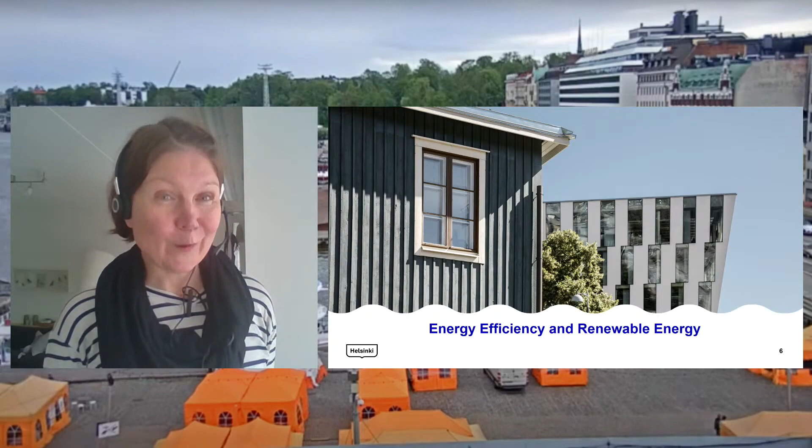Solar PVs are a very good and easy solution, but as I told you earlier, the biggest source of emission is heating. So you should also think about the heating system and use of renewable energy in the main heating system. That's a very basic thing, and by doing this properly, you're able to cut quite a big part of the emissions of the building already.

The next one, please. But of course, we are running out of time. We only have 14 years left before we hit our target dates, and it's not enough to only focus on the use phase of the building. So energy efficiency and use of renewable energy is a must, but it's not enough.

When we look at the carbon footprint through a life cycle, the embedded carbon of construction materials is a very main thing. We have calculated this many times, and in every calculation, the embedded carbon of materials of the main frame and the amount of materials needed are the two main things that really dominate the carbon footprint of buildings and constructions. So this is the other thing you really should focus on if you want to reduce the emissions of the building.

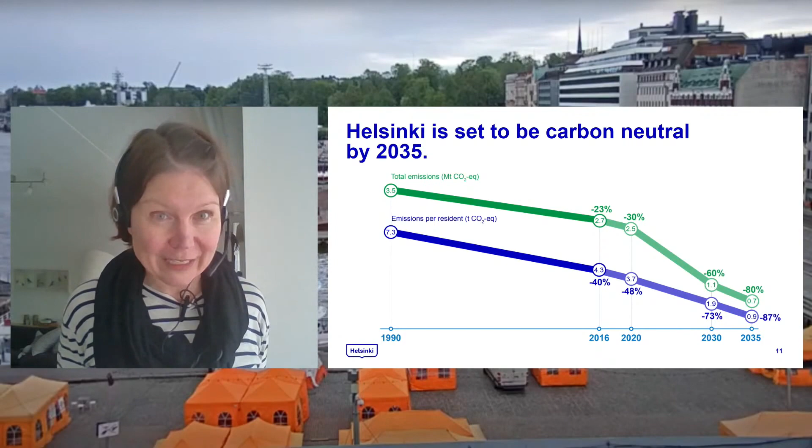Next one, please. I really hope that you will join us and help us create a climate neutral city where life is very good. Thank you on my behalf.

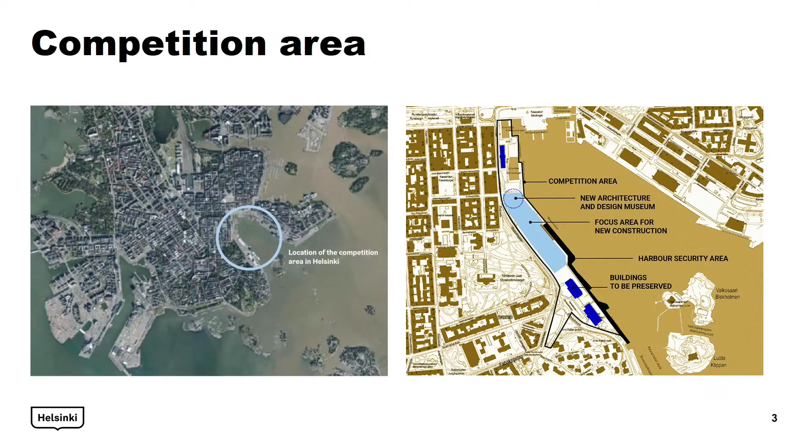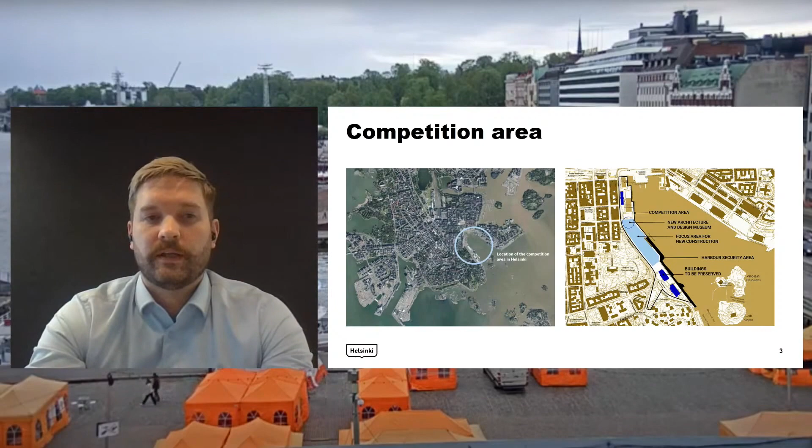The location of the competition is in the Makasiiniranta area of South Harbour Bay in Helsinki, Finland. The area extending from the old market hall to Olympia Terminal is part of the national landscape of maritime Helsinki, and in part a built cultural environment of national significance.

As stated earlier in some of the presentations, it is possible to propose culture, service, business, and other facility constructions for the area. The objective of the competition is to develop the area as part of the expanding pedestrian city center and the seaside trail around the shores of Helsinki.

A key goal of the competition is to produce an overall land use plan that takes into account the city's objectives in terms of land use and urban landscape, and the value of the area in terms of cultural history. The winning solution serves as a basis for the future development, detailed planning, and implementation of the area.

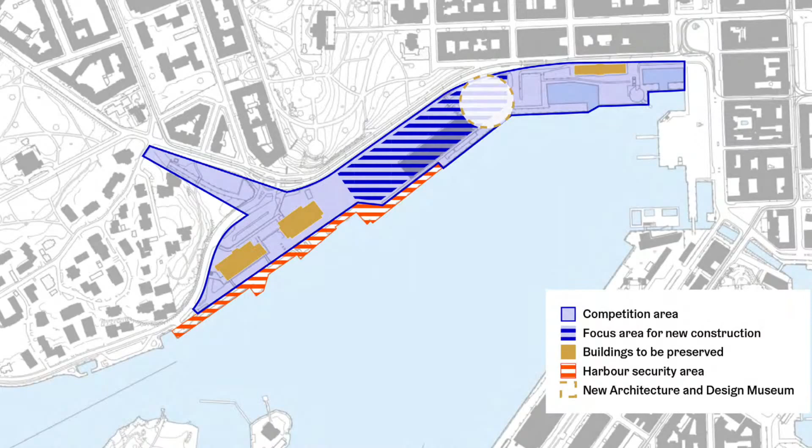The competition area covers a wide range to make it possible to plan alternative solutions for new construction and its detailed location. The focus area for new construction is the Makasiiniranta area, located between the line of Eteläinen Makasiinikatu Street and Port House, i.e. Satamatalo.

As stated earlier, most of the current port operations will be moving away from the area. A reservation for high-speed vessel and international cruise ship traffic will be maintained in the area, and therefore there will be a harbor security area, but more details about this are in the competition documents.

The competition includes the area plan for the Architecture and Design Museum, the aim of which is to ensure that the museum becomes a natural part of the area. A new building for the museum is part of the broader development of Makasiiniranta, so there are plans for a separate architecture competition concerning its realization. The museum is therefore not included in this competition, but space has to be reserved for it when planning the area.

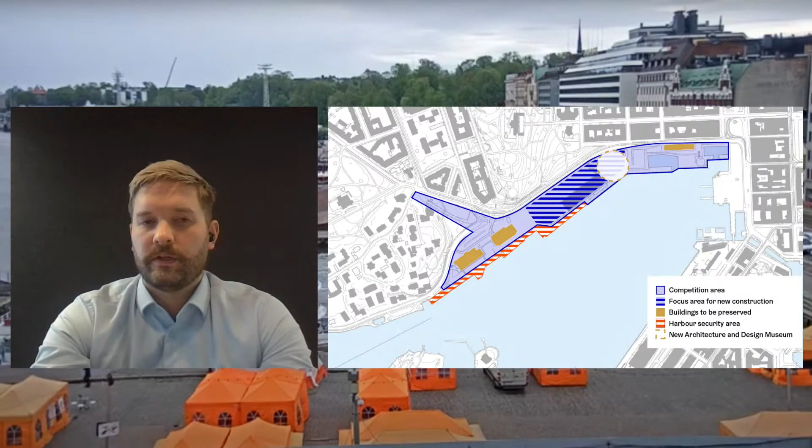The historically valuable buildings to be preserved in the area - the old market hall, Olympia terminal, and port house - can be included in the area handed over to the winner if they are part of the concept of the winning entry.

The City of Helsinki has received some questions regarding why the competition is not targeted at architects or designers only. There are clear reasons behind this. In any case, architects do have a major role in the competition due to the high quality which is sought after. In addition, the future implementer, i.e. the winning organization, is basically required to commit to the designer.

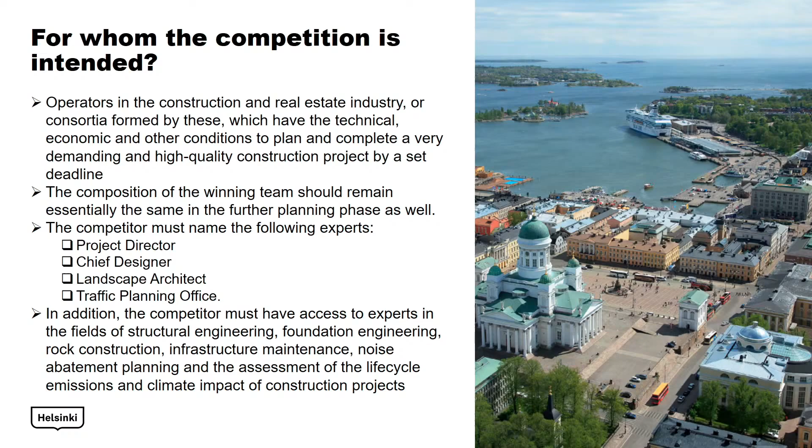The winner of the competition will be responsible for the functional, technical, and economic concept and solution of the plots to be formed and the new buildings to be built, as well as the historical buildings located on them. The winner of the competition will act as an implementer of the area and commit itself to the development.

The competition began on May 12th. We're now in the competition seminar phase, and there are two deadlines for questions, June 14th and September 30th. The first important deadline is June 21st. By then, competitors should have registered for the competition. The submission of Phase 1 competition entries is on December 10th, and the selection for Phase 2 is early next year. The competition will begin with the approval of the participants.

Teams will apply to participate with a free-form application, which must include a statement of fulfillment of the minimum eligibility requirements set for the competitor. More information about this is in the competition program. The application form is available on the website, along with all the other necessary documents at this point. As stated, the application is mostly free form, but there are certain economic and financial conditions and registrations that are required, along with references.

In the first actual phase of the competition, the competitors will submit a draft plan for the area as a competition entry. The competition entries will be submitted under pseudonyms by December 10th, 2021. The competition entries will be put on public display as stated. The evaluation panel, i.e. the jury, will select a maximum of 4 best competitors for the second phase.

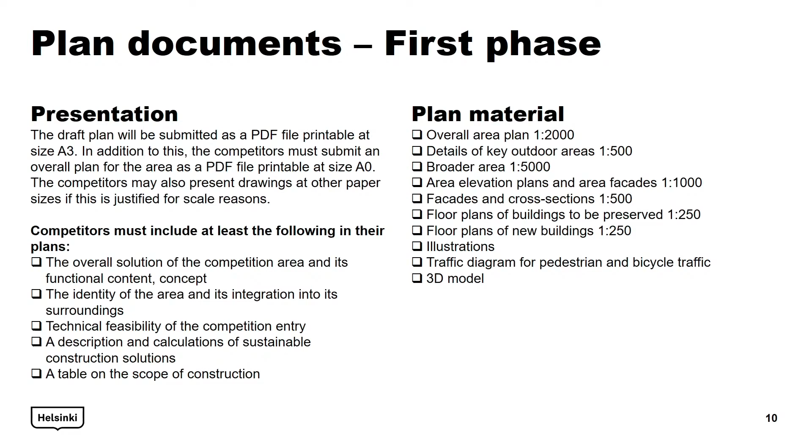They will also submit the total price calculated on the basis of the building rights. If the buildings to be preserved in the area are part of the concept of the competition entry, the competitor must also submit an offer for the buildings.

All necessary details on competition assignment, preparation of the competition entries, and evaluation of the competition entries can be found from the competition program. The competition program, as well as the appendices, can be found from the competition website.

In the first phase of the competition, the evaluation will focus on the overall solution and idea of the plan and its integration with the values of the surroundings and the landscape. Throughout the competition, the evaluation will pay attention to the realization of the planning principles.

The evaluation criteria set out in the competition program concerns overall solution in terms of cityscape and landscape, overall functional solution, the old market hall and harbor buildings, architecture and design museum, feasibility and techno-economic quality, and climate-smart construction. A more detailed breakdown of the criteria can be found in the competition program.

The functionality of the overall solution and its potential for development will be considered more important than any of the individual evaluation criteria.

The starting point for the plans and detailed planning of the competition area will be the winning entry, and the detailed plan will be drawn up by the City of Helsinki in the form of so-called partnership planning, in cooperation with the winning party who receives the development reservation. The planning area will be reserved for the winner of the competition for approximately 2 years for the development of the project and further investigation of the conditions of implementation.